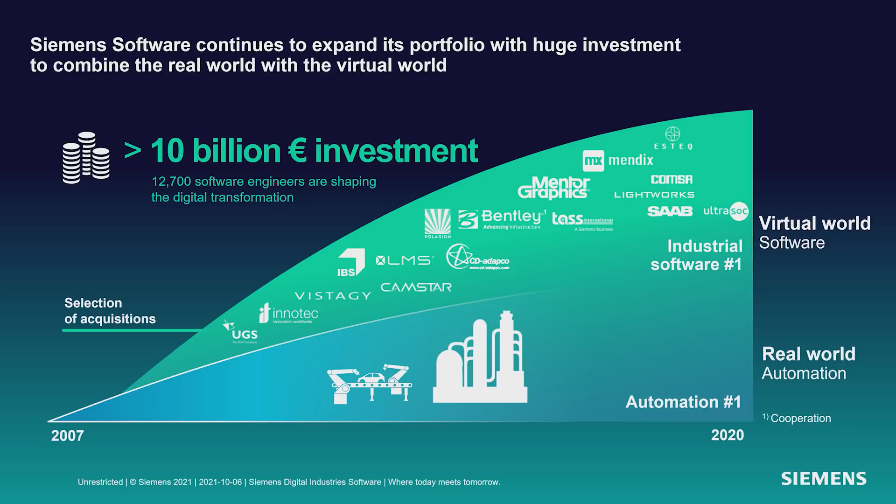One of the reasons we're able to do this is our investment. Over the past 14 years, we've invested more than €10 billion in bringing in new functionality to Siemens. In fact, Siemens is one of the top 10 software companies in the world. This allows us to bring you Xcelerator. Xcelerator is an integrated portfolio of software, services, and application development platform that really speeds your digital transformation. So no matter what you're doing, whether it's mechanical, electronics, manufacturing, we have you covered.

And it all starts with Solid Edge. Solid Edge is your on-ramp, if you will, to digital transformation. You're probably familiar with lots of Solid Edge capabilities for sheet metal, 2D drafting, etc. But maybe you need to go beyond that with the whole Solid Edge portfolio and Xcelerator, whether that's managing that data, doing technical publications, simulation, electrical, it's all there for you.

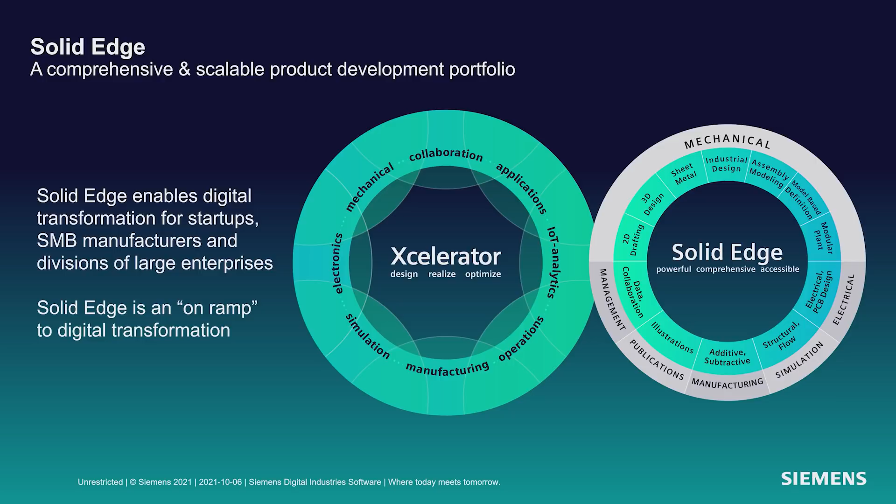And what we see is customers doing amazing things with Solid Edge and the Solid Edge portfolio. For example, Innovates. Innovates is a company in Belgium that makes mobile charging stations. And they're able to take Solid Edge and PADS Pro and use those two together to do great things. As you see, they don't find that level of integration in other engineering software.

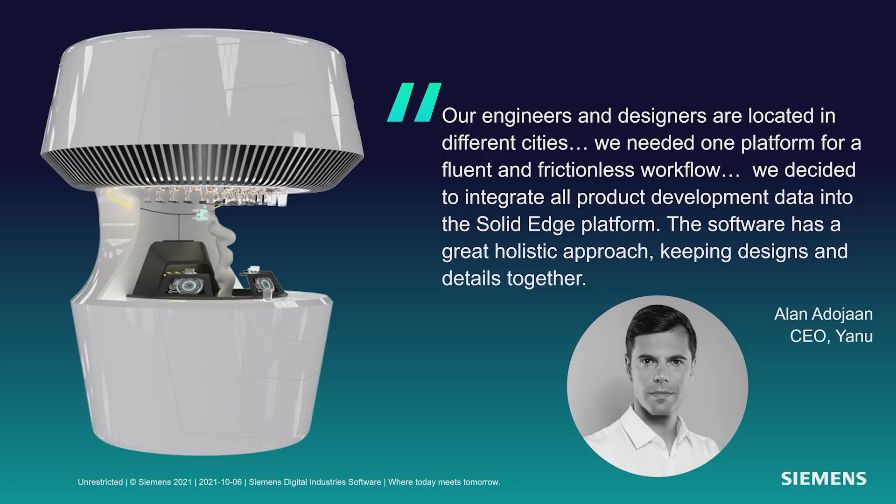Another great example is Yanu. They make the beautiful product you see on the left here. What product might that be? Probably something you've never seen before. This is a fully automatic digital bartender. It can recognize you, make the proper drink, do the proper billing, all contactless, very important today. And I love what Alan has to say. The software has a great holistic design approach, and that's what we like to see and how we can bring you more productive software.

So let's talk about Solid Edge 2022 itself. Solid Edge 2022. Engineered to grow your business. There's so much in it, we'll only be able to cover some of it today. Things like Xcelerator Share, allowing you to collaborate with customers and suppliers. Or CAD Direct, integrating CAD files from other systems and bringing them directly into Solid Edge seamlessly. Point cloud visualization, big scans of plants, being able to design your equipment in context of that big scan. Solid Edge Design Configurator, a whole new capability to configure your designs quickly and easily for your customers.

Now, as we go through our discussion today, we're going to be using two different data sets because there's just so much to see, such a broad range of functionality with Solid Edge. We'll be working with an espresso maker from Fiamma, a company based in Portugal. And we'll also work with a product from Bergner, a company based in Switzerland that makes chemical and pharmaceutical custom machinery.

So let's start by talking about mechanical design. And let's start with CAD Direct. CAD Direct lets you seamlessly integrate data from other systems into Solid Edge without translation and automatically take updates. We'll also talk about convergent modeling. We've been working on this technology for several years now. It's getting very sophisticated. The ability to integrate mesh models with BREP or solid models in one seamless way. So let's look at that with Jeff now.

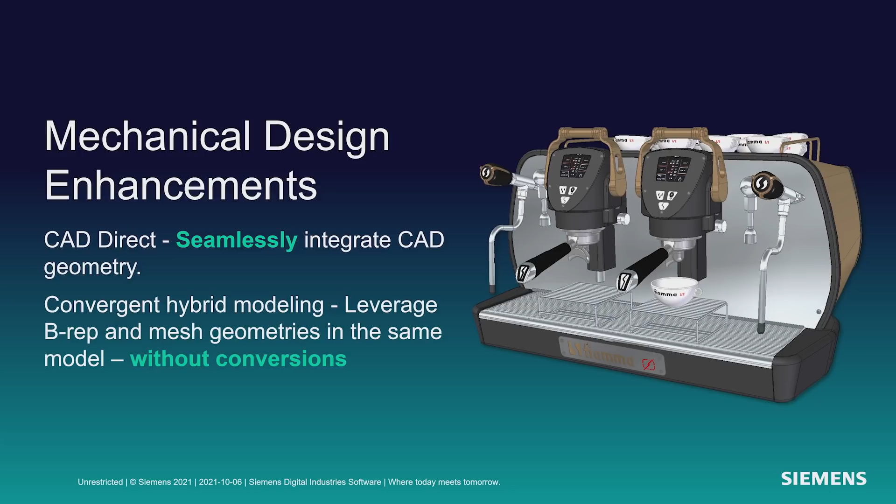Thanks, Dan. First, we'll take a look at subdivision modeling. In this example, we will add support members to the base of the Fiamma espresso machine. The new subdivision bridge command can be used to easily connect edges or faces of subdivision cages and create a lofted structure between them. Here you see an example of that, where we'll select the faces of each subdivision model that we want to loft between.

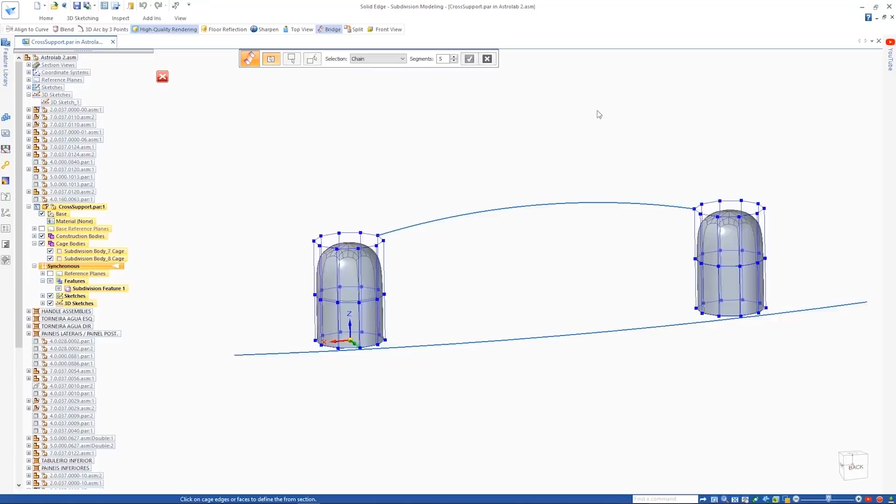Then we'll add the control curve to help us further define the overall shape. Next, we'll be using the new Align to Curve command to further define the shape of the part. Simply by selecting the cage vertices to define the direction and then picking the curve, those vertices are automatically mapped to the curve. You can even sketch your own shapes and curves inside the context of the command. Even gesturing is supported for inking of your curves.

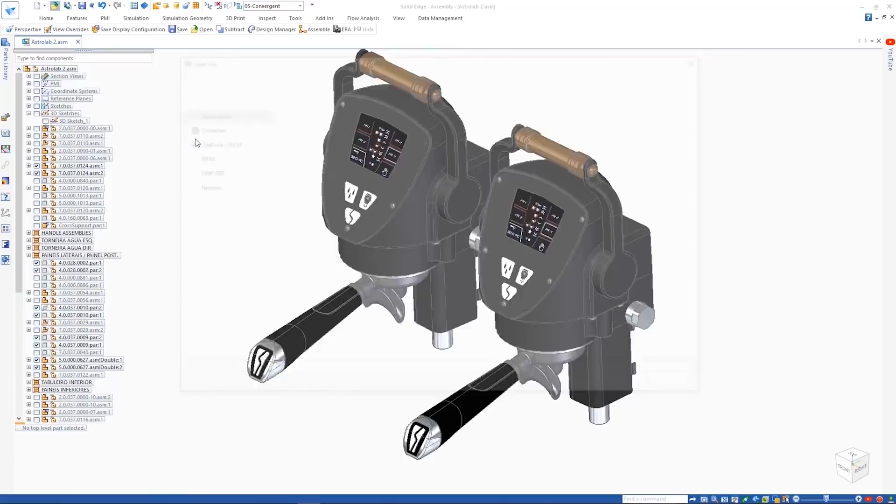Here we'll show another option called Split with Offset to add some pockets to support the rubber feet of the support. A simple selection of the edges with an offset allows you to pull to create the pockets for those rubber feet. Next, we're going to replace the handle with a new design that's been 3D scanned.

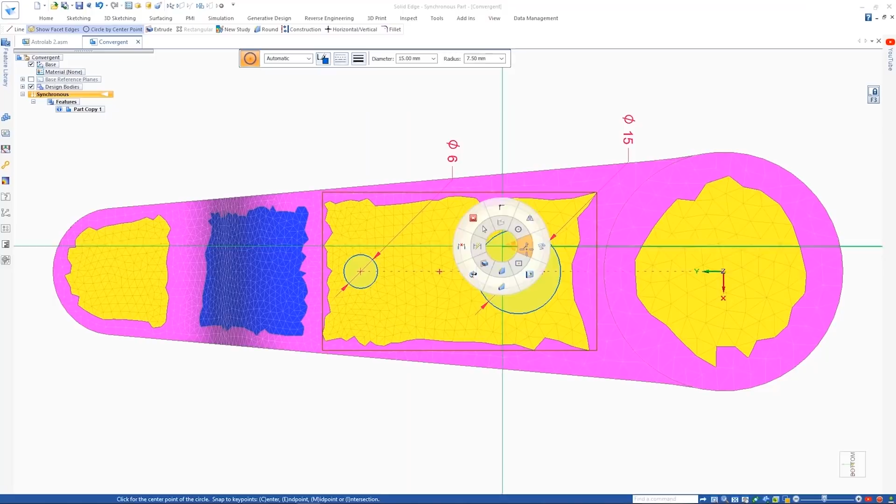This result is a mesh model that we import. We can visualize the mesh with the new Show Facet Edges command. In this case, we'll clean up this model a little with the Remesh command. Now, faces have automatically been identified and the sketches are added to the planar faces of the mesh.

We add a series of cutouts in order to reduce the weight and improve the appearance of the part. Notice the resulting geometry isn't faceted. Solid Edge now seamlessly combines mesh and B-rep geometry in the same body or part. We'll add additional cutouts to reduce the material. Once the cutout is complete, it can be patterned.

Finally, we're back in the assembly where we'll replace the current handle with the new meshed handle. But you'll notice the mounting holes are missing from the component. This can easily be solved by doing a Boolean operation using the mesh model as the target and the components from the assembly as the cutting geometry. These new capabilities further enhance your ability to use mesh models in your design process.

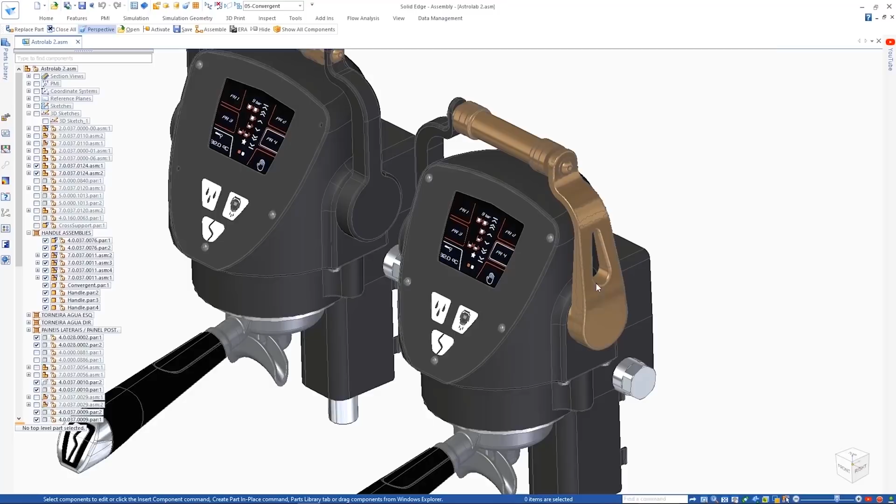Now we'll use the new component finder in the Solid Edge Pathfinder and we'll search for the desired filter holder handle, which is designed as a family of assemblies. One of the versions is designed for a double espresso shot, the other is a single espresso shot. Opening the drawing of this assembly, we'll use the new family of assemblies parts list to place a table and detail the parts used for each member.

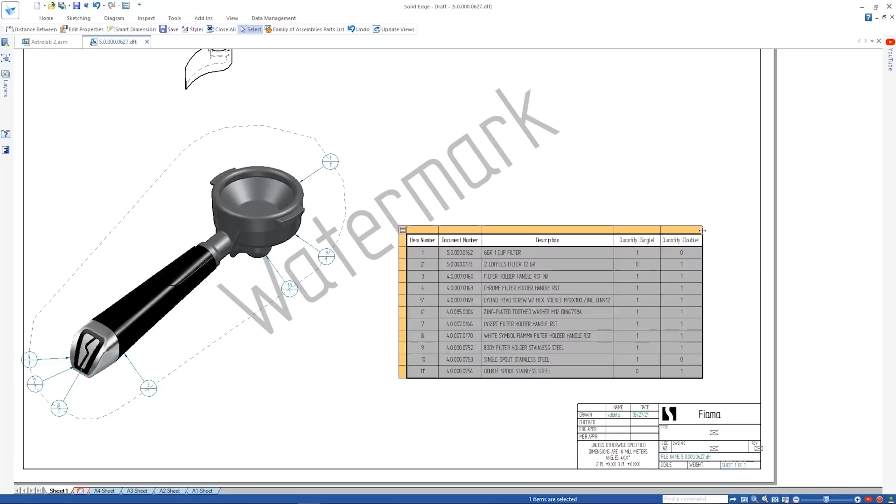Now we'll look at some enhancements to dimensioning in Draft. Dimensioning to virtual intersections or arcs of rounded edges is now supported. We can also choose to display projection lines to those intersection points. Watermarks are also used to convey important information on the drawing. We'll change the existing one so that it retrieves the document status for the drawing property text.

The new CAD Direct command enables us to use foreign CAD data, geometry, and assemblies in Solid Edge directly without requiring any translation. The water boilers that you're looking at here were designed in NX. Once inserted into Solid Edge, they can be positioned just like any other assembly. Since we need two of these, we'll simply copy one to create the second.

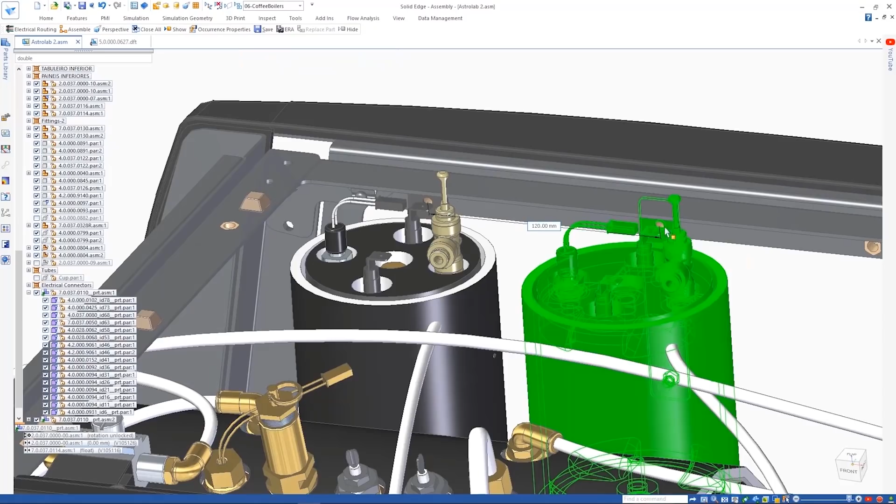Notice the boilers aren't quite in the right location. We'll go back into NX and make the changes needed to the mounting bracket such that they'll be in the right position. Since Solid Edge has associative links with NX, a simple update brings the changes in.

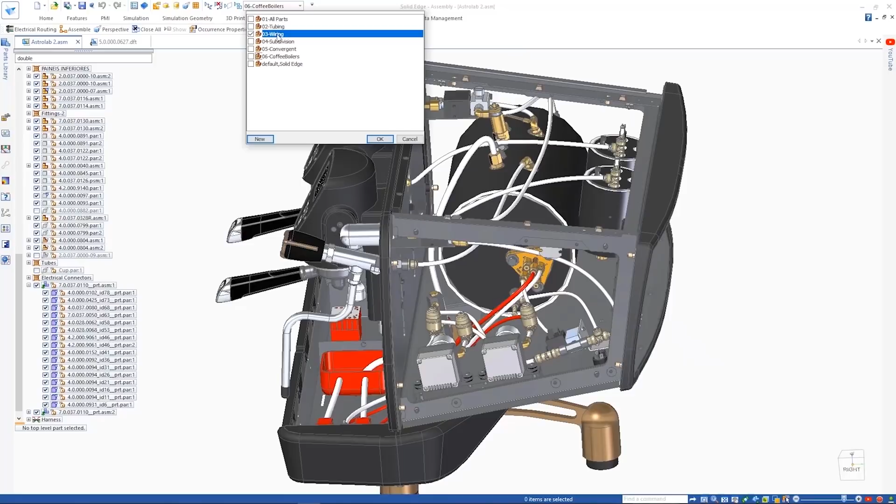Next, we'll look at electrical routing enhancements. Solid Edge now supports the display of bicolored wires, allowing us to change the display of this ground wire to be striped green and yellow. Various pattern types are supported as well, including single stripes, helical stripes, zebra stripes, and dashes.

Back to you, Dan. Thanks, Jeff.

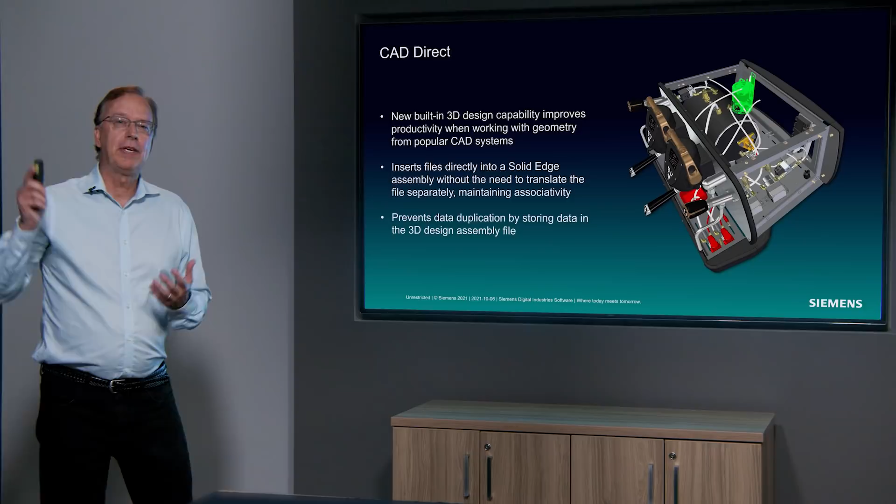Lots of amazing stuff in there, but I'm only going to highlight a couple things here that I think are real game changers. CAD Direct. So you have the capability you've seen to get an NX assembly into Solid Edge directly, no translation. And when you make edits to that NX assembly, it comes into Solid Edge automatically. There's no extra files to manage. You don't have to worry about that.

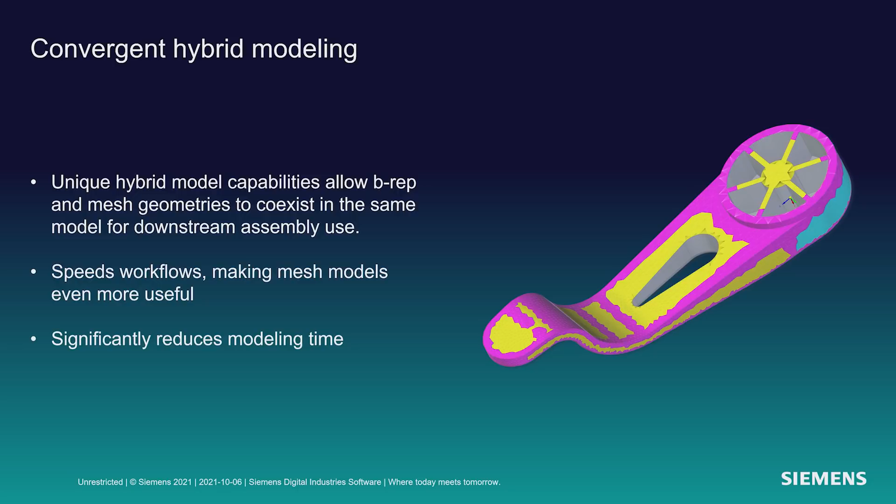It's all CAD Direct. And what about convergent hybrid modeling? You saw taking triangle meshes and B-rep solid models, pulling that all together into a single cohesive model, significantly reducing your design time. Let's talk about some other mechanical design enhancements, some other great things in here.

Point clouds. It's becoming fairly common to be able to scan an entire plant or factory and bring that data forward. We can now bring that data into Solid Edge so that you can design in the context of that factory or plant. What about large assembly modeling? We see people first building parts, then assemblies, then whole factory lines. Assembly modeling in Solid Edge keeps getting faster and faster and faster, best in the business.

And Synchronous Radiate, an amazing new command within the synchronous modeling environment that allows you to deal with radially symmetric parts and edit those effortlessly. So let's take a look at that now, Jeff.

Thanks, Dan. Well, the first thing we'll do is we'll take a look at a new assembly preview mode. And this mode allows you to very quickly open Solid Edge components and very large Solid Edge assemblies lightning fast. In preview mode, you can manipulate the view, show and hide components, and apply display configurations. In this case, we'll isolate the most critical part of the model that we want to edit using a configuration. Then we'll simply tell the system how we want to open, and open only the components that are to be edited, saving you time and memory.

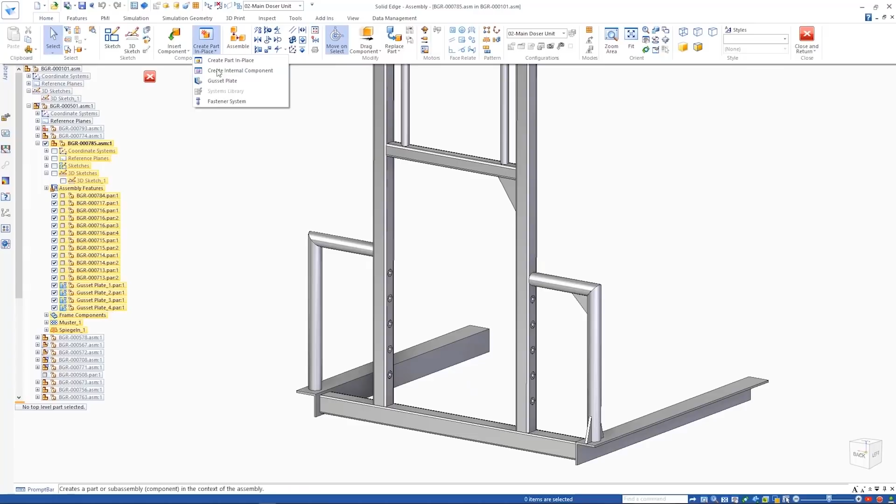Another time-saving enhancement is the gusset command. We now allow you to automatically add gussets to a frame structure. Here you can see the user interface. You can define these gussets in any shape and size that you desire. Then you simply select the frame element, position where the gusset is to go, and the system automatically creates the component there.

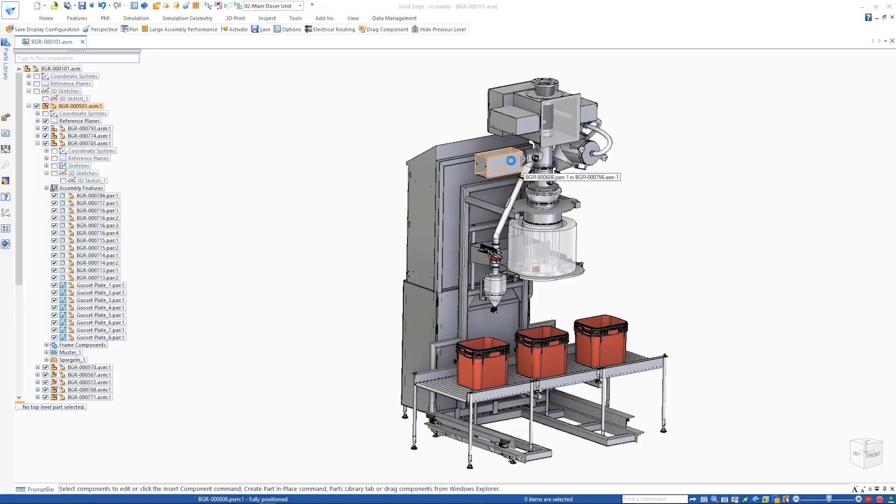If we continue down the internal components theme that we introduced in the last release, we now allow you to create an internal component and actually create the model geometry directly inside the Solid Edge assembly. We've introduced this new assembly modeling capability that gives you the ability to create the entirety of a design without any need for an external file.

Here we have a pneumatic cylinder which will be imported as an internal component. We need to add a bracket to this assembly, but since it's a purchased part, we'll just create this as an internal component. And again, saving the need for external tracking of files. If you'll notice during sketching, a pop-up menu allows you to quickly access commands that are relevant to your selection. And this is new for Solid Edge 2022.

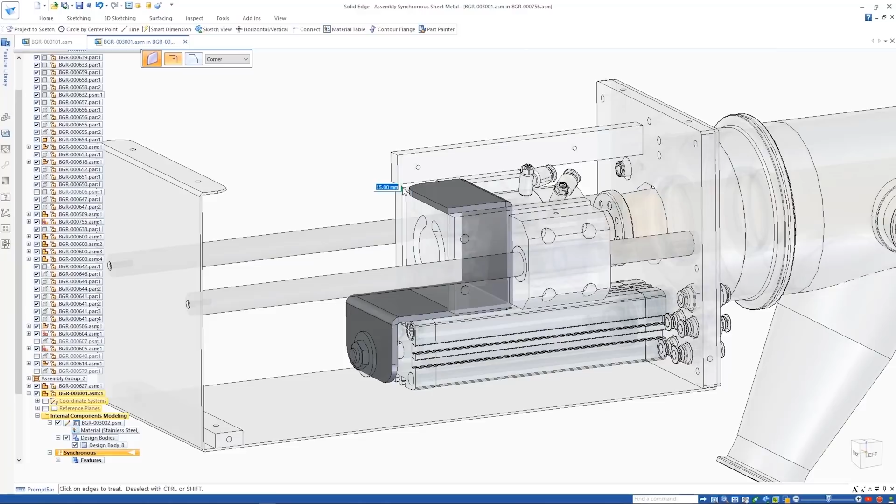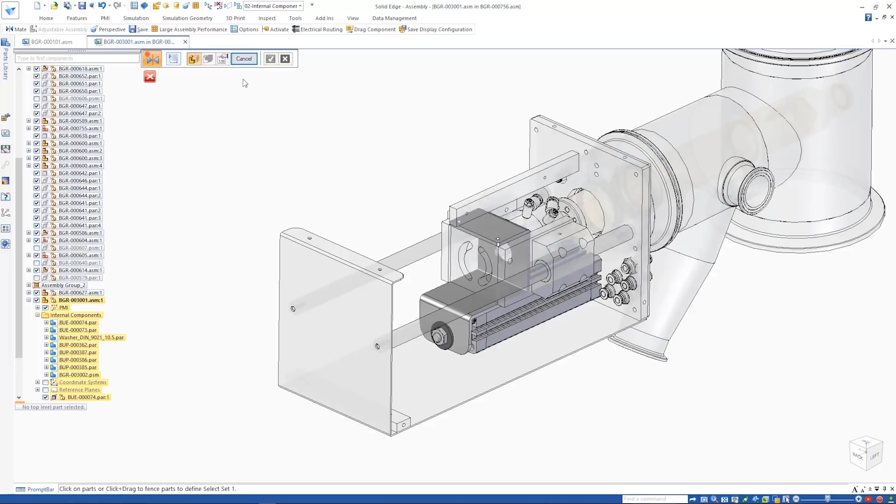So we've defined our sheet metal part. We also will have to give it a material definition and a gauge definition. In addition, we're able to create geometry and reference the components from the assembly, whether they're internal components or they're real components in the assembly. So again, we're defining the material gauge for the sheet metal component, and we've defined this component completely inside the context of this assembly. You're also able to drag the component, doing animations using both internal components as well as the real component combined.

The new component finder speeds up the process for locating parts within the assembly. You simply key in the name and it finds the list quickly. Here we found a shaft, and we used the new radiate command to edit the radius or the diameter of the shaft component. You simply select the shaft, putting the component in the select set that you wish to change, and then Synchronous does the rest. In this particular example, we want to include the pocket in the radiate and the offset option. Simply selecting that pocket and including it allows that to be done.

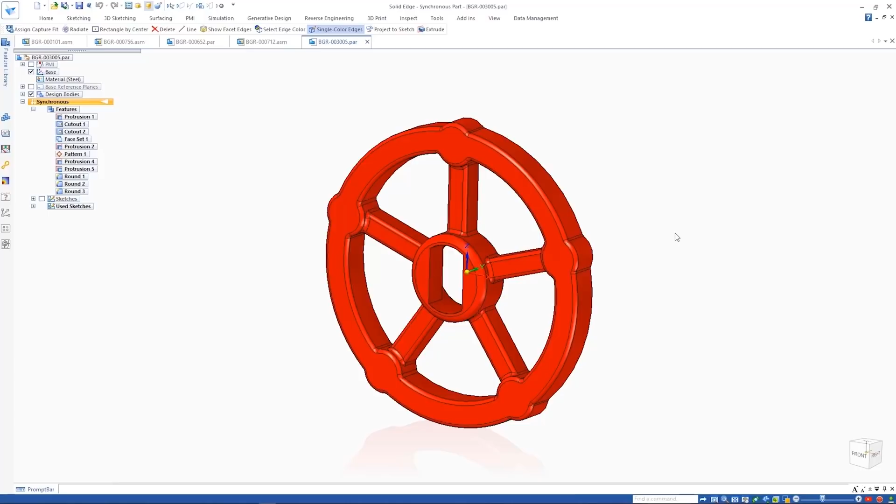A new Assign Capture Fit command allows relationships to be predefined on a component while in the context of the part. Here you can see that Capture Fit relationships already exist. We'll add a new Capture Fit to the collection and save it to the component. When I place the handle into the assembly, all you have to do is select the component and select the mating components that you want to mate it to, and the handle automatically snaps into place. It's as easy as that. Here's another example where we have a handle that needs to snap to 5 new locations. Again, the Assign Capture Fit makes it easy.

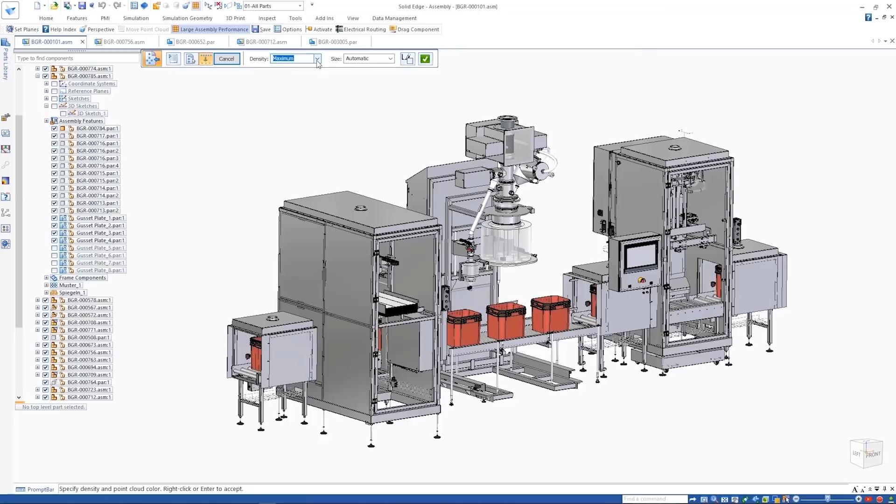Solid Edge now has the ability to place point clouds within the context of your design. This allows you to reference and visually indicate where your components will be placed inside a large assembly. Solid Edge supports multiple point types and then allows you to position your component inside the context of the plant design. The point cloud can be easily repositioned. Clipping planes can be used. You can even measure to the location of the point clouds relative to your design. Here you see that the tank component was in the wrong position and it was moved to match the point cloud and the plant definition more precisely.

And that's it, Dan. Back over to you.

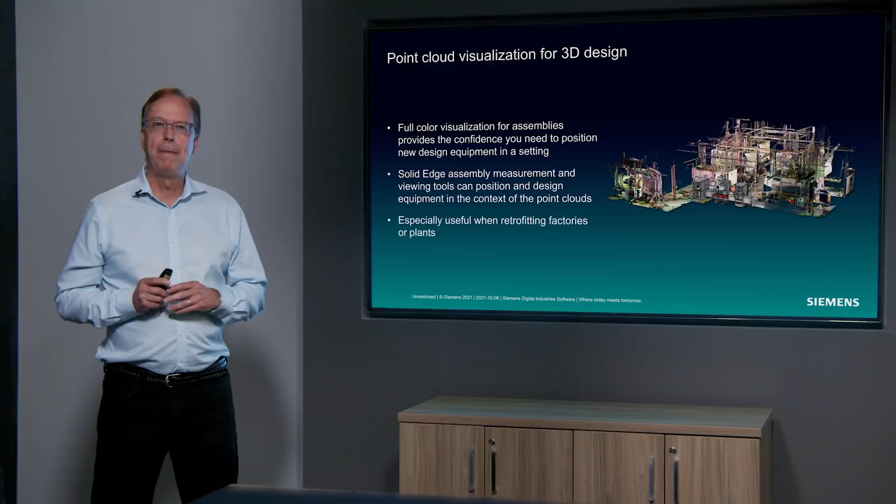All right, thanks, Jeff. So many great things to see in there. But again, something I really want to highlight to you is a game changer. Point cloud visualization. The ability to take scans in, gigantic scans, millions or billions of points, and be able to look at those in the context of Solid Edge and be able to integrate your design directly in there and design in context of that point cloud. As you can see, they're full color, they give the full feel of the plant or factory. Really amazing stuff.

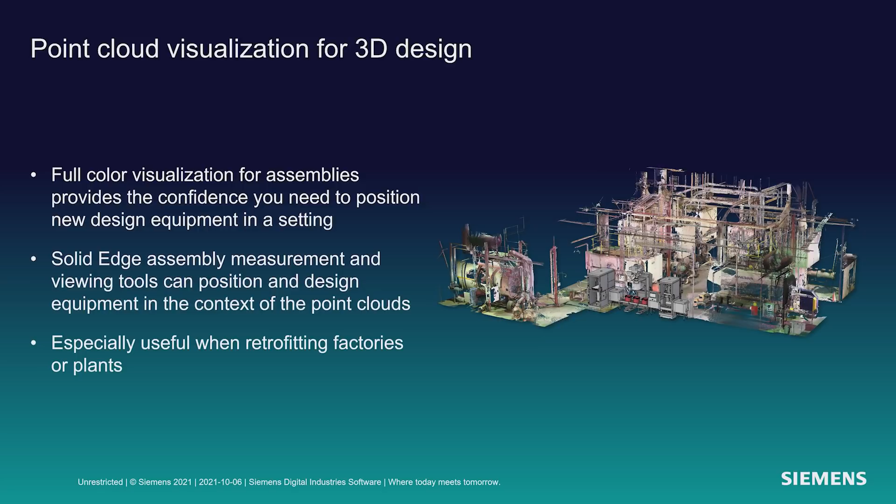And we see that our customers really love this new technology. So Benjamin at Bergner, for example, eliminated a lot of tedious manual effort. It's just so much easier with the new point cloud technology.

And what about large assembly modeling itself? Order of magnitude increase in large assembly modeling performance. So you have that preview mode where you can very quickly bring up the assembly, very, very massive assemblies, decide what you want to work on, and then just bring in that bit of the assembly. Really improve your productivity.

And we see that folks are already taking advantage of this. Our beta customers have been using this, like Luca Carminati at CMS. Much, much faster work, save a lot of work on their designs.

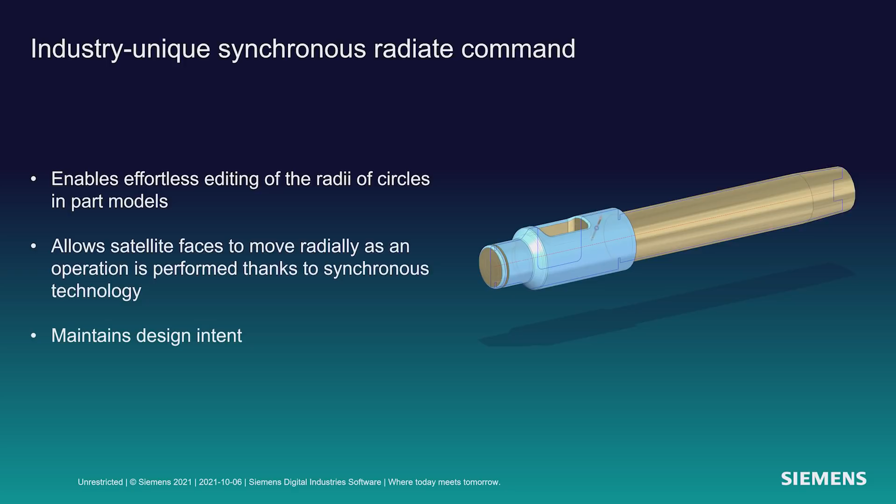And what about synchronous radiate? Really amazing stuff if you're working on those axisymmetric parts. Being able to make edits without having to do any extra effort happens almost magically. Great stuff.

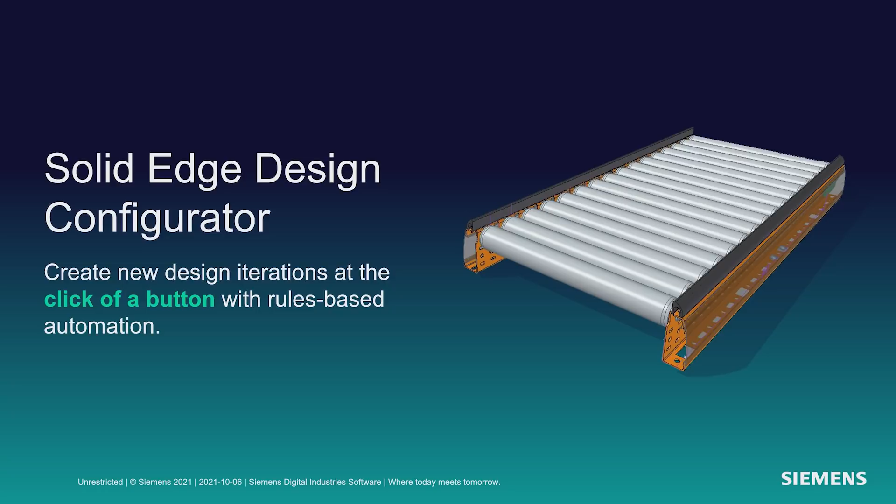Okay, next up is Solid Edge Design Configurator. I'm very excited about this. If you're doing any engineer or configure to order type of products, the ability to very quickly change your designs and have new quotes very quickly. Let's take a look at it with Jeff.

Thanks, Dan. The new Solid Edge Design Configurator allows you to design multiple product variants directly in the context of Solid Edge. In this example, we'll configure a variety of conveyor designs. The first step is to select the component to be configured. The next step is to define the master input parameters of the configuration. In this case, it's the length and width of the conveyor plus the pitch of the rollers.

Values can be easily edited for any parameter, and images can be included in order to help the end user identify the needed inputs when configuring the model. Defining a new input parameter for the pitch of the conveyor, we will quickly configure the name, type, label, and render style to use radio buttons. The pitch value of the conveyor can be customized between 60 and 90.

However, since different lengths of the conveyor require different pitches, visibility rules need to be applied. This is done by making use of a simple expression to define the intelligence. Here, the rules are being validated to ensure consistency and proper definition have been made. Here, the function is going to be copied and pasted to allow you to easily reuse formulas without having to include them again. Skipping to the last step of the configuration, we can see the configuration form is properly created.

Next, defining the rules for the process. Here we have multiple rules to drive and configure the connectors at the bottom of the conveyor. We will use a combination of simple condition and expression rules and a truth map table to work out the number of positions of the connector. All rules can be quickly validated.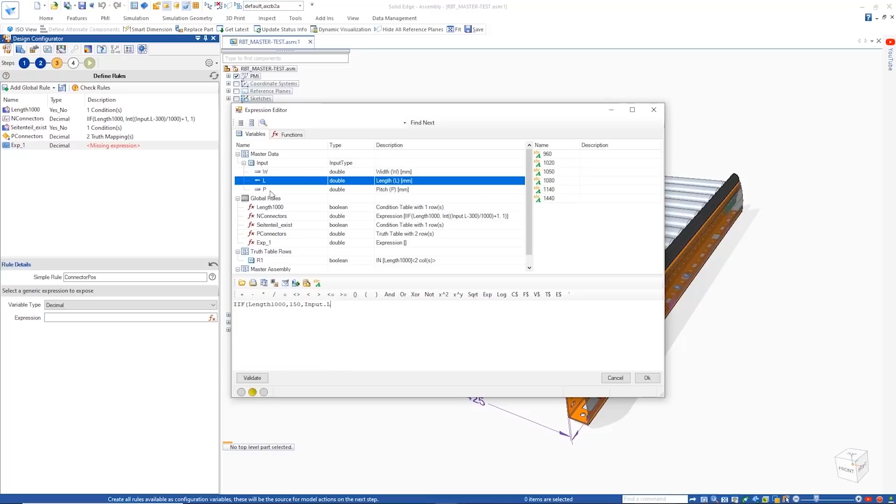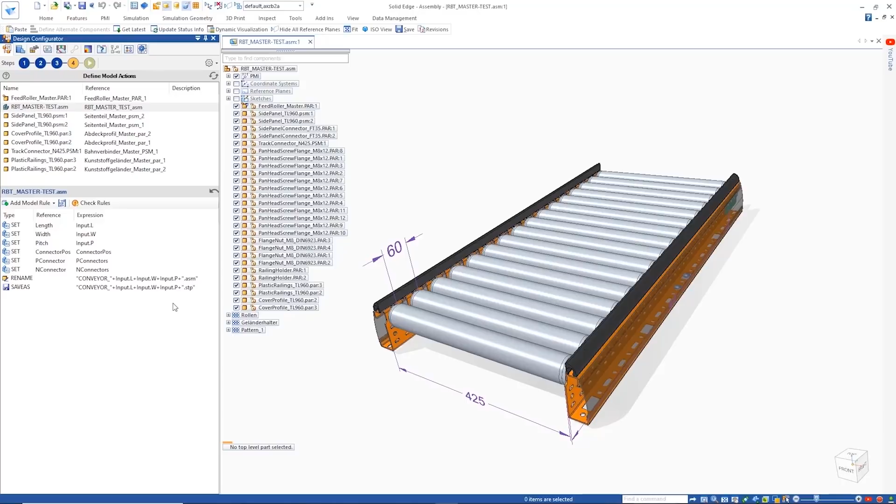Finally, we specify the actions to be taken. Here, variables are set and components are replaced to satisfy the input parameters. A rename model action will ensure our final assembly will be renamed appropriately and also create the other necessary outputs, for example, a STEP file as shown here.

Now we can run it quickly and create as many configurations as needed. A newly generated configuration can easily be shared with Pack and Go. The configuration logic is all stored within the CAD model. There's no need for any further plugins or external resources. And with that, Dan, I'll hand it back to you. All right, thanks, Jeff.

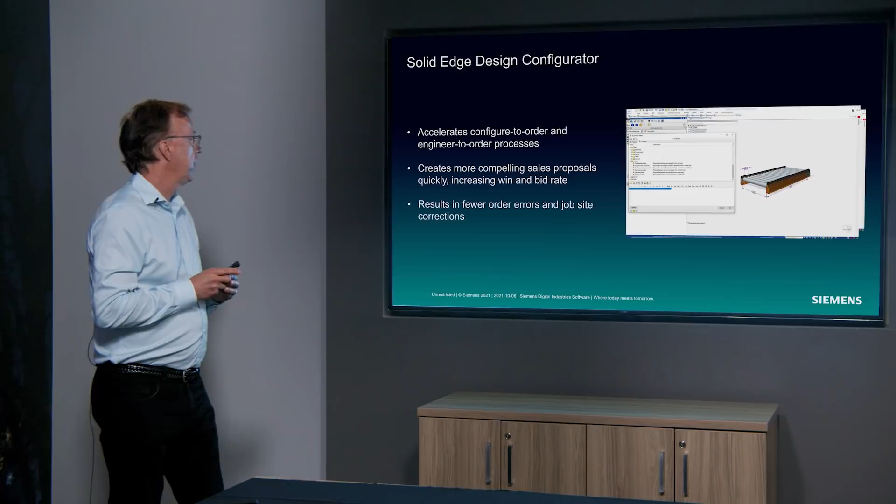So as you see, with the Solid Edge Design Configurator, you can accelerate your configure to order and engineer to order processes and create compelling sales proposals. You're also going to see that it really error checks for you and it creates a nice dialogue for your users to interact with so you can very quickly configure new products.

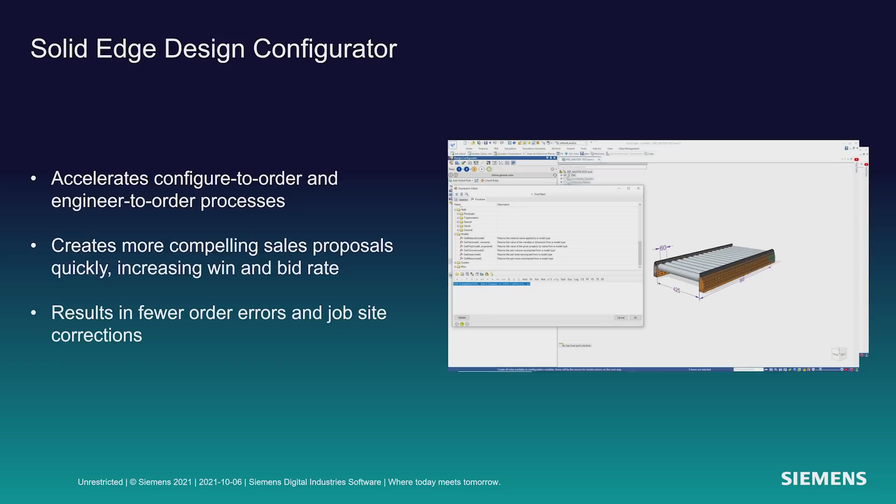What about CAM? Solid Edge CAM Pro. Tried and true technology developed over the last 40 years. A lot of users are using it today and enjoy the benefits of it. But what if that technology was available to all of you, all Solid Edge customers on maintenance? That's what we want to introduce to you today with Solid Edge 2022. Jeff. Thanks, Dan.

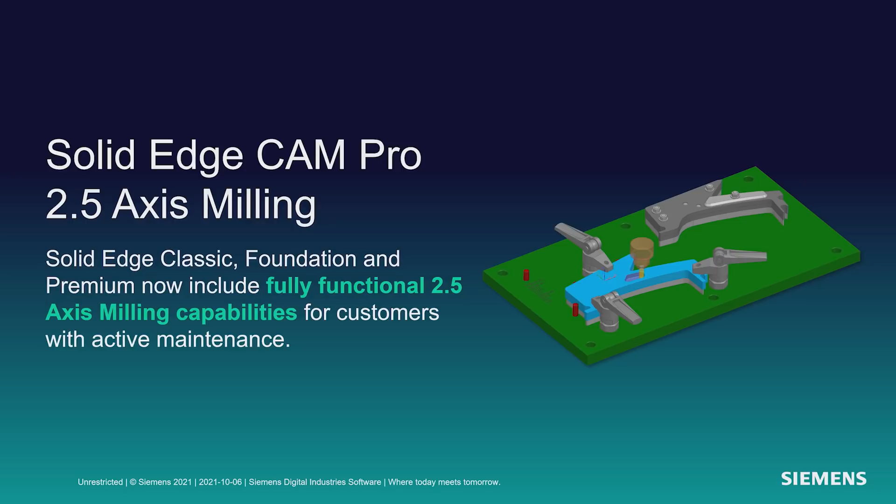Here we'll be using Solid Edge CAM Pro to create the manufacturing toolpath for the rear legs of the Fiamma espresso machine. First, we'll use the Solid Edge assembly tools to create the shape to represent the stock parts, and also the parts that form the fixture assembly, which includes the standoff plate as well as additional fixing holes from the standard database.

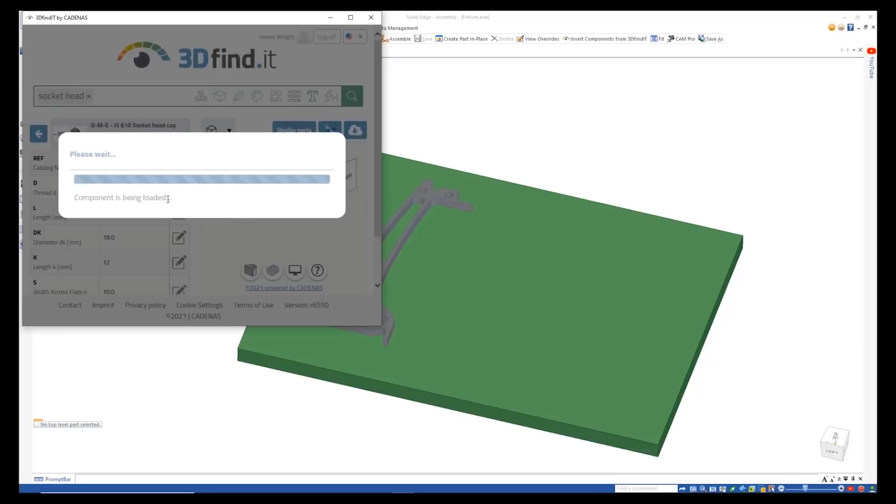We will also make use of the supplier catalog in 3Dfind.it to get the appropriate socket head cap screws to be used to fix the component in the fixture. So as you can see, Solid Edge is a great CAD for CAM tool.

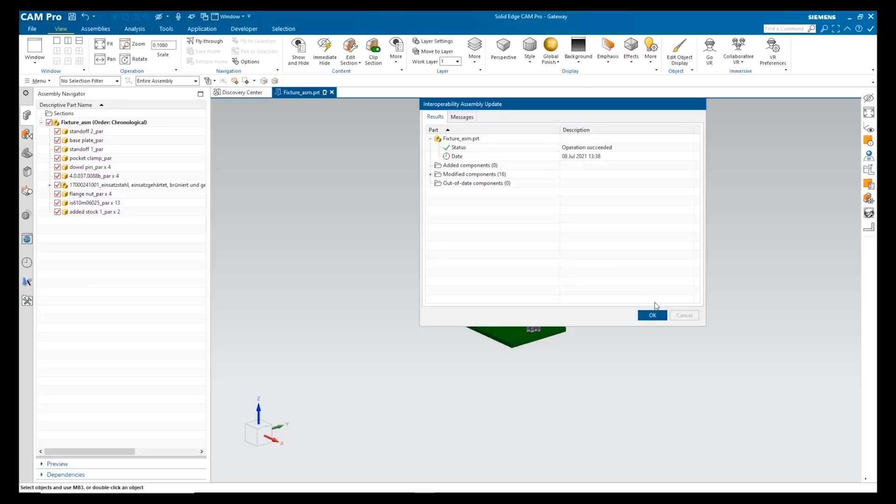We'll need to machine this in two separate steps. Step 1 is to mill the pocket and drill the holes, and step 2 is to machine the profile. One click will send the entire assembly to the Solid Edge CAM Pro application. Note that associativity is maintained to the complete assembly, so if there are any last-minute changes, we can quickly update them and continue the NC programming process.

New for Solid Edge CAM Pro is the ability to create adaptive roughing toolpaths for 2.5-axis operations. This is included at no additional cost. These are faster than traditional toolpaths and extend the cutting life of your tools. Notice the advanced graphic capabilities for validating your toolpath.

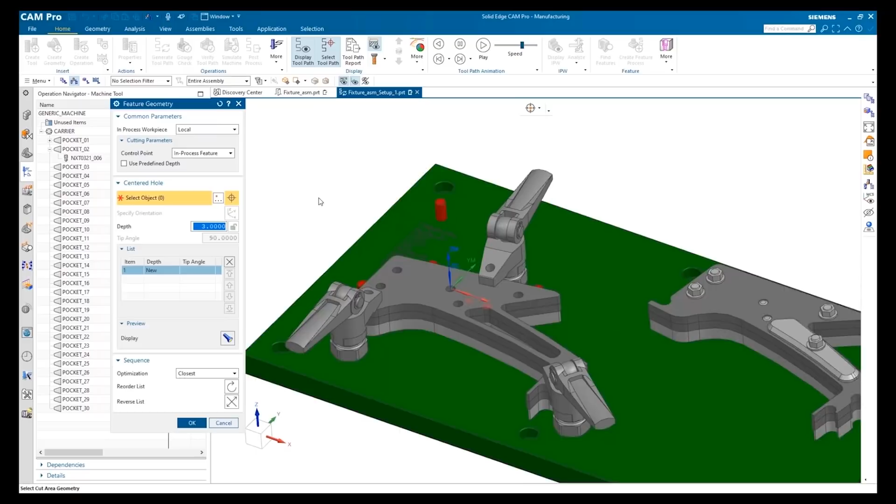Here we'll create spot drilling operations for the 5 holes in the support. Notice the graphical pop-up hints that help us with operation selection. Graphical helps are also available for geometric selection. Each time we select a hole, we get a preview of the machining that will take place. Again, at any point in the process, we can get visual feedback on our decisions.

Now that our CNC program is complete, let's run through the whole visualization process. Notice you get to completely visualize the entire machining process before committing it to machining. Of course, no job is finished until it has been post-processed for a specific machine. That's where PostHub comes in. It's an online database of over 1,200 post-processors. You can easily filter and find exactly the one you need. Also, PostHub is constantly updated, bringing you the most recent tools.

And Dan, with that, I'll turn it back over to you. All right, thanks, Jeff. I'm really excited about this. There's a great heritage in Solid Edge CAM Pro and our machining technology over the last 40 years. Many people enjoying that technology, but now every Solid Edge user who's on maintenance can enjoy that technology and work with Solid Edge CAM Pro.

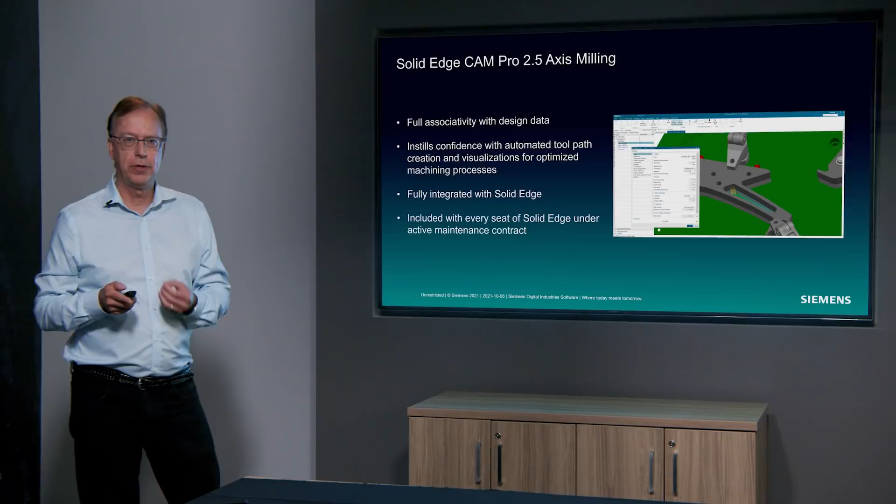Next up is Xcelerator Share. I'm super excited about this. It's a functionality in Solid Edge that allows you to collaborate with colleagues, suppliers, customers very easily. Nothing for you to set up, works on all sorts of devices. So let's take a look at that.

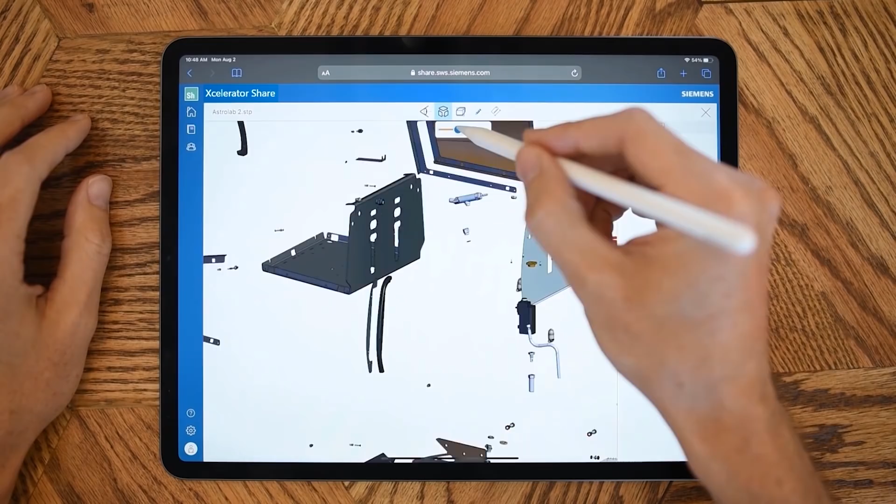Jeff. Thanks, Dan. Xcelerator Share allows you to import your CAD models into a secure cloud location. Within that context, you can view, you can rotate, you can show/hide, you can 3D section, you can even do measurements and markups. Here, a reviewer has identified the need for some change in the design. The location of the change is identified by a sticky note and a place describing the needed change.

Xcelerator Share offers maximum traceability, as all markups are recorded, enabling conversations back and forth on any of the issues you're tracking. It also records who made the markups and when they were made. We can also easily go back to the markups at any time. Simply save your markups and send them to the designer for review.

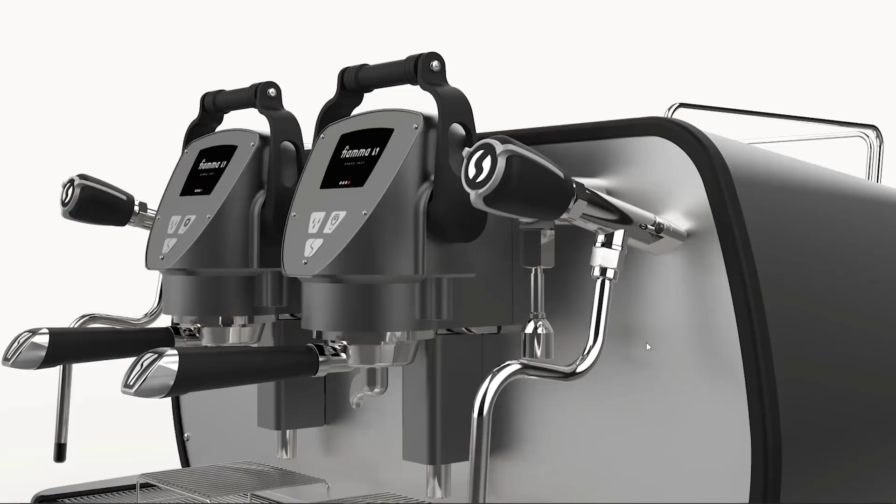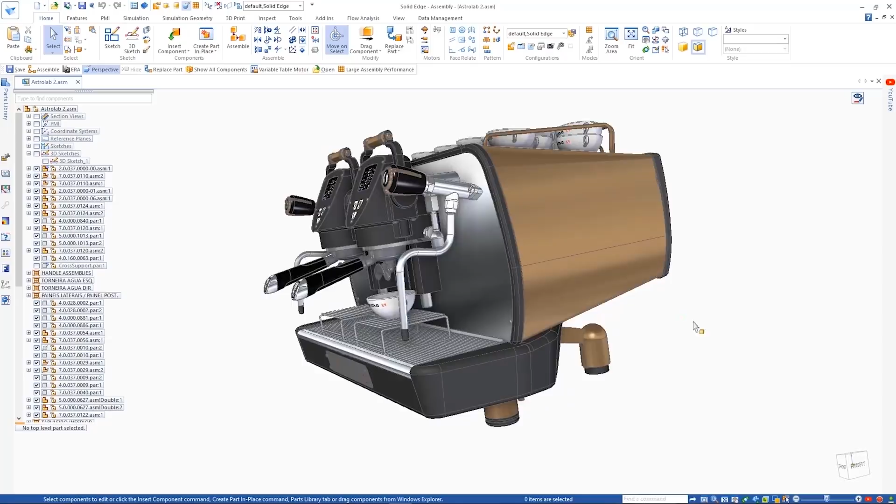With Share, you can also directly connect to Solid Edge, synchronizing your data from your desktop to the cloud. Here we have the same project on our desktop. It's represented simply as a folder. Any data that we have in this folder will get synchronized in the background. In Solid Edge, we can securely sign in to Xcelerator Share and see those same cloud-based projects. The espresso machine can be opened and we can go right to work on the part in question. The designer can easily access that same markup in the cloud directly from within Solid Edge.

Once completing the change, another markup continues that two-way conversation and collaboration with other stakeholders so that the issues are tracked appropriately. Another great feature of Xcelerator Share is the ability to share a project with anyone. Simply enter the email address of the person with whom you'd like to share and choose their access permission level. Here we can choose View, or View and Download, or Edit and Download, depending on how you want to protect your intellectual property. We'll share this design with one of your colleagues and our customers and give them the appropriate access.

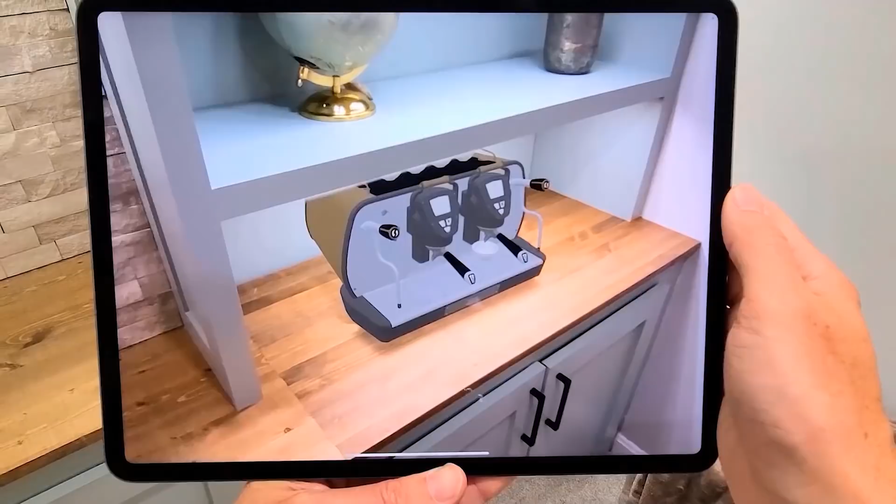Finally, with the Share Augmented Reality feature, you can see exactly how your designs will look in the real-world environment. Snap the design onto any surface seen in the camera lens at the correct scale. Finger gestures can be used to manipulate the model and easily visualize what your design looks like in a real environment. So back over to you, Dan.

Thanks, Jeff. All right, Xcelerator Share. Really great stuff. Next generation cloud-based collaboration that allows you to work inside your company with colleagues or work with suppliers, work with customers. Nothing for you to set up. Works on every device. So whether you have a Mac or an iPad or a Chromebook, it works on all those devices with no special setup. And you saw the ability to write notes that are automatically converted to text, share those markups. Very exciting stuff.

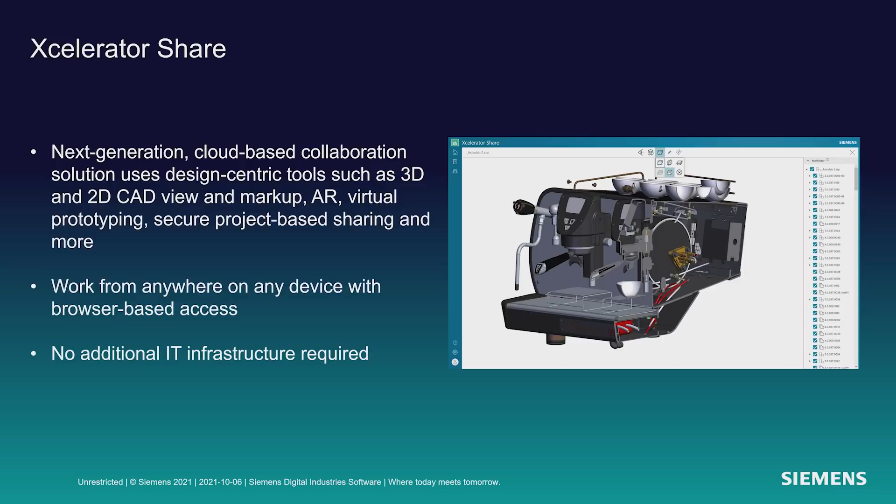Next up is dynamic visualization. You make complicated products, large assemblies. How do you know which parts are from which supplier, or which parts are of what material? Dynamic visualization will help you with that problem. Let's take a look at that now with Jeff.

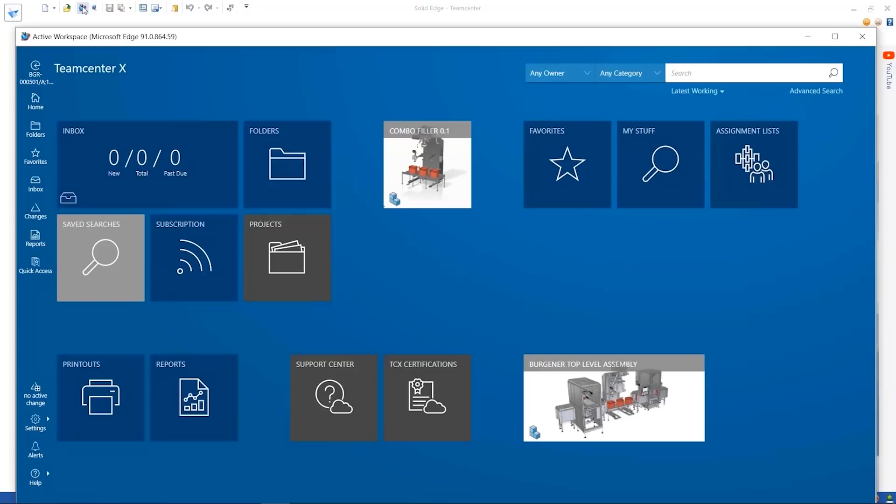Thanks, Dan. Dynamic visualization gives you great capabilities to generate visual reports of your assembly. We'll open a Solid Edge assembly using Teamcenter Active Workspace and create a visual report based on the component supplier and material definition. First, you add columns to the user interface that you want to filter on—here we've added suppliers and material—then filter on the particular material and supplier you're interested in visualizing.

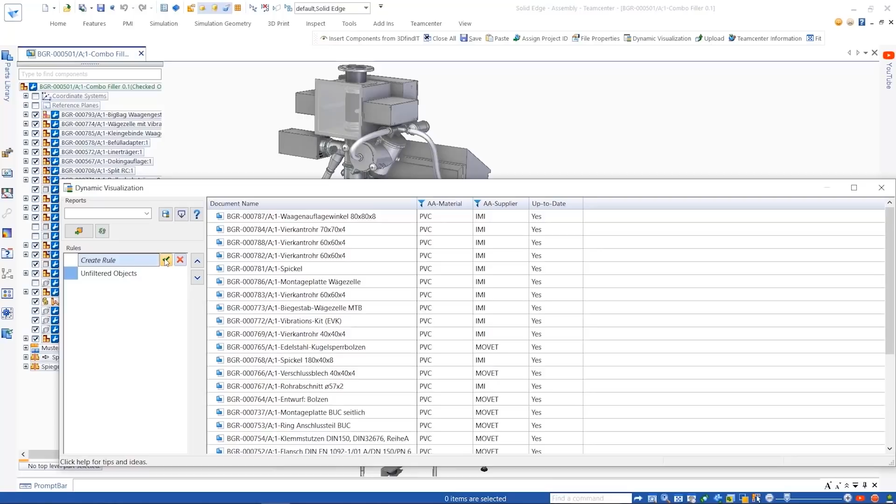Once the rule is created, you simply apply it, and the model changes display to show the rule definition. Here you can see in red the components based on that supplier and material selected. You can also export these rules and import them into various assemblies.

Here we have a rule that allows us to identify which user created which components. We'll modify that rule to allow us to identify work in progress as well as components created by Pat.

We can highlight those, select them, and then go into edit mode. Here we'll see we need to add a warning light to this box. We use 3DfindIT to find the particular light from the particular supplier that we want.

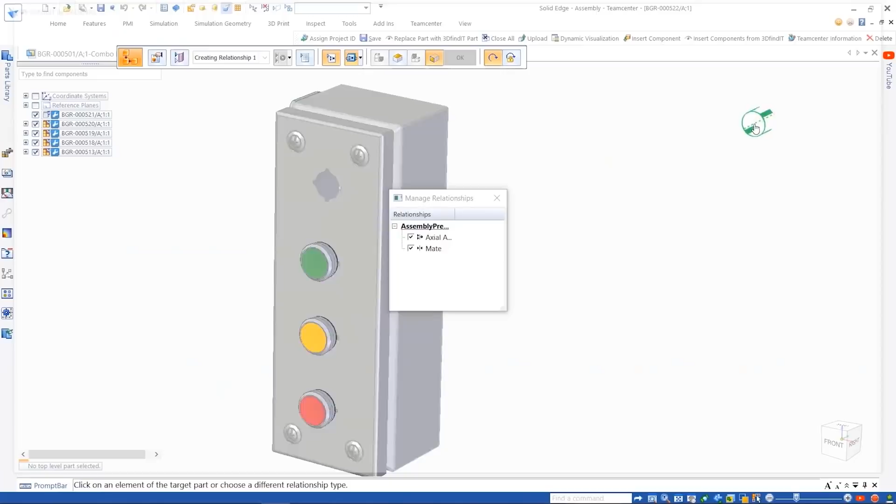Once we've identified the right one, we'll generate the component in Solid Edge. But in this case, the component already exists in the Teamcenter database, so instead of replicating it, we'll simply reuse what's already there.

Also in Solid Edge 2022, we're able to take advantage of the project definitions within Teamcenter. Here we can see we've assigned the components to a particular project in Teamcenter.

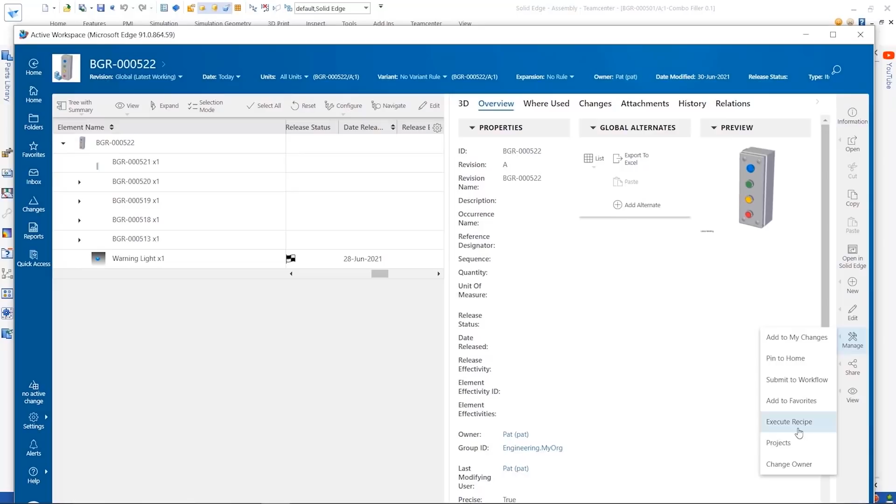The Solid Edge built-in data management also supports dynamic visualization. Here again, we'll display the assembly coloring based on the material type to ensure we have the proper materials throughout the model.

So again, the rule is applied and visually displayed, and you'll notice the red handles should be green—those should be stainless steel and not aluminum. So we'll send those back to the designer to be reworked with the proper material applied.

Once applied, we can do an auto update of the status, and the system will automatically show us the status and update to get the latest component. In this case, the handles are updated with the proper material. We'll rerun the same rule, and you'll see the handles are now green and therefore in the correct material.

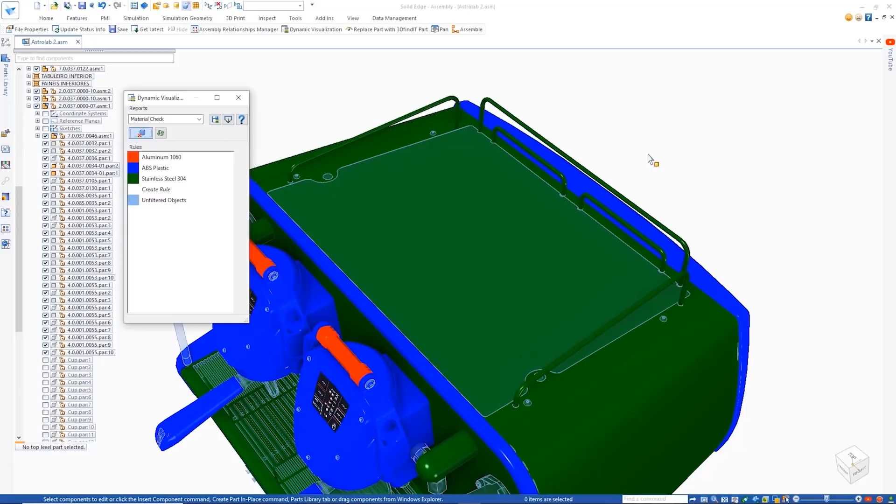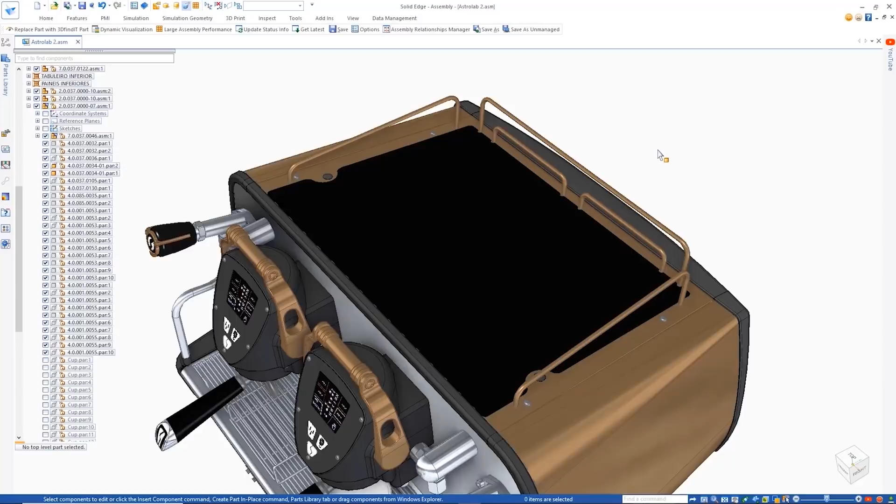This next example will use replace part with 3DfindIT. 3DfindIT has the ability to take a component and use its geometry to search the catalog database for similar components.

Once the component is found, we identify the supplier that we desire, and with a few simple clicks, that component is inserted into the assembly, replacing the previous geometry.

And lastly, we've added Pack and Go directly to the Windows Explorer UI, making it easy for you to share your data without having to open the assembly within Solid Edge. That's it, Dan. Back to you.

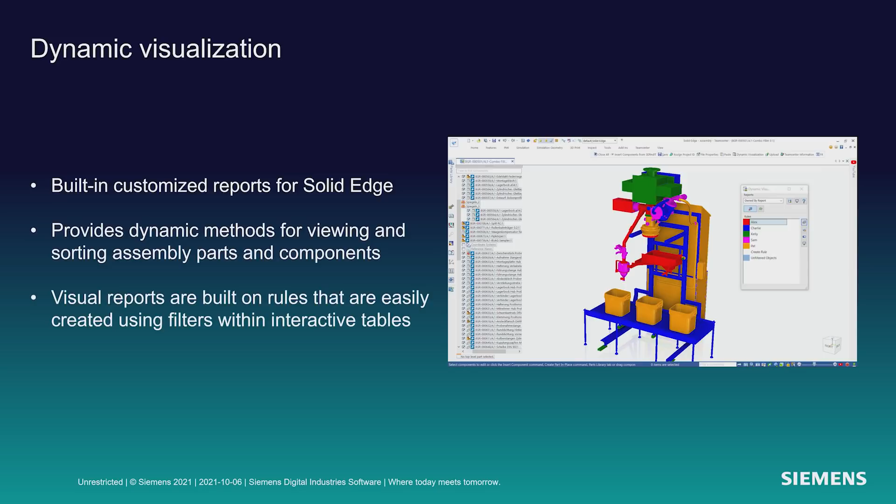All right, thanks so much, Jeff. So many good things you saw there with 3D Find It and the ability to replace components, search directly using geometric shapes, and so on.

But I want to highlight this dynamic visualization—being able to say, what supplier do I have for the different components? Color code for me all the things that are stainless steel. Color code for me all the parts that are in work. Amazing technology that would save you a lot of time and money.

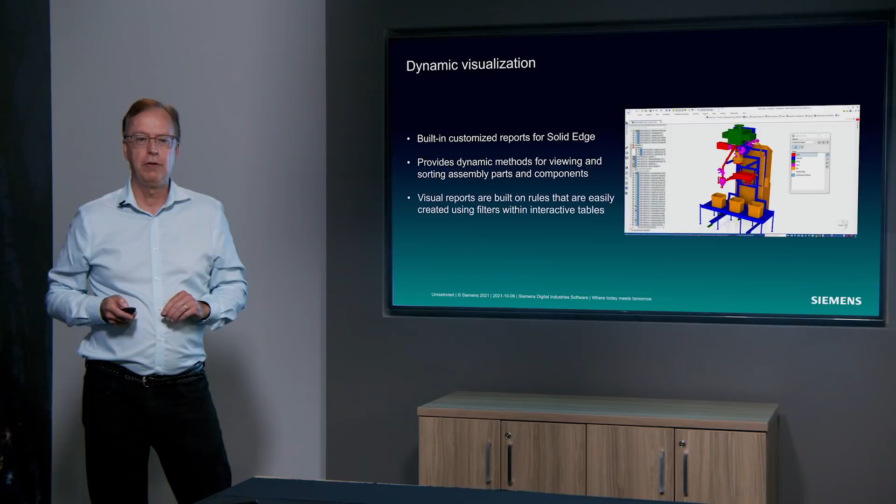Next up is Solid Edge simulation. We have some great enhancements in there, some game-changing enhancements in terms of the ability to remesh parts using the body mesh command, and some other great tools. Let's take a look at those, Jeff.

Thanks, Dan. We'll start by looking at a new boundary condition allowing the user to apply hydrostatic pressure to a model. We'll apply a configuration that gives us the geometry of interest. Here we want to look at this tank on the left and do an analysis, assuming that tank is filled with liquid.

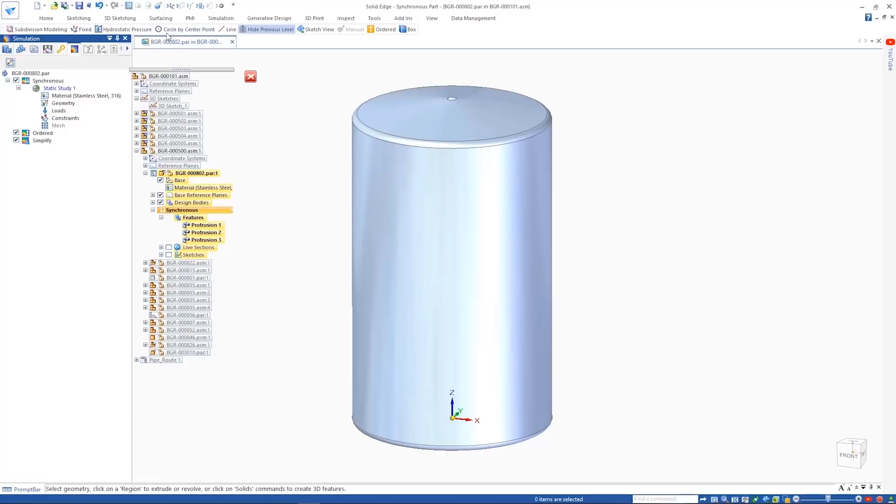So we'll create a hydrostatic study, and in the definition of the loads, we'll use the new hydrostatic pressure command. All you have to do is identify the surface to apply the load, identify the depth of the liquid in the tank, and then provide the density of the liquid within the tank. Solid Edge will do the rest.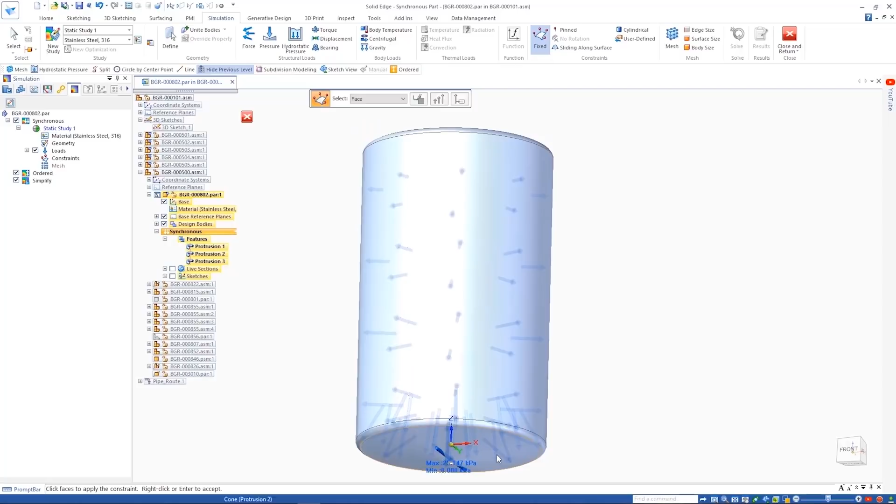To finish the analysis model, we'll apply constraints to the bottom of the tank and then perform the meshing and analysis as needed. Notice on the new mesh dialog a body mesh.

This is proprietary technology from Siemens that does a really good job meshing complex models. Some things that couldn't be meshed before can now easily be meshed much quicker and much more reliably than in the past.

So here you see the result of the hydrostatic pressure load in this tank. We'll change the liquid level in the tank and run the analysis again just to validate that this tank will withstand the pressure exerted on it in production.

There you see the animation of the stresses, and they show up in the obvious place at the bottom of the tank where you might expect.

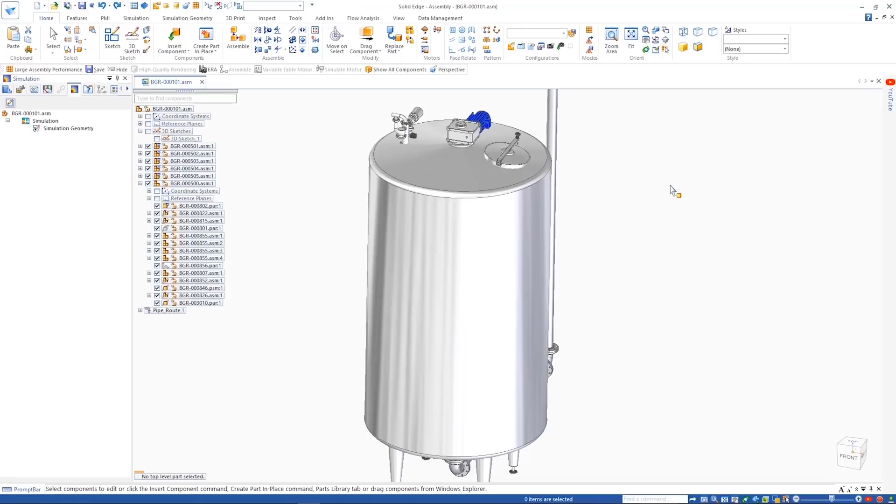Another great enhancement we have in simulation for Solid Edge 2022 is improvements to beam meshing. Here we're taking a frame structure and creating beam elements for the finite element analysis. Notice that the rigid connectors were automatically placed.

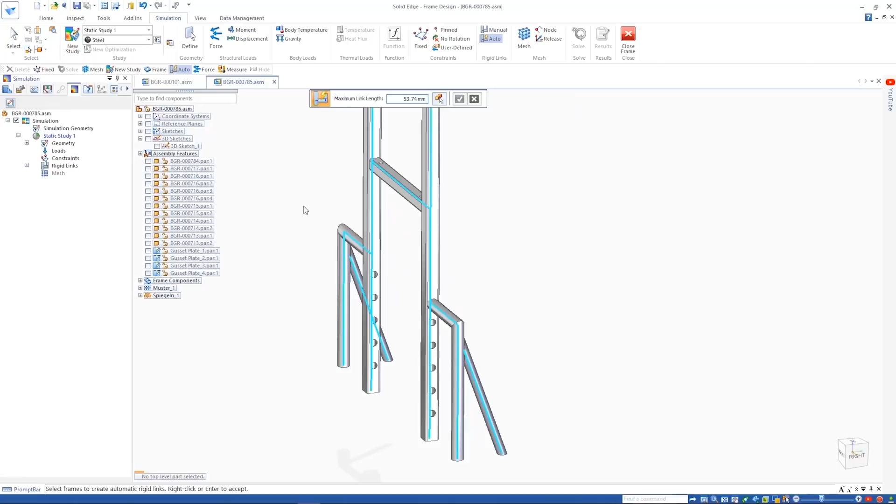We've improved significantly our ability to create those connectors automatically without any user intervention. Here the user has selected the bottom and changed some of the parameters to get the rigid connections correct. The bottom of the frame is then fixed, loads are applied, and the analysis is run.

Once complete, you'll see some enhancements to the output, to the post-processing for this model. We can now post-process and display contours using von Mises stress, and we've also improved factor of safety stress contours based on those same von Mises stresses.

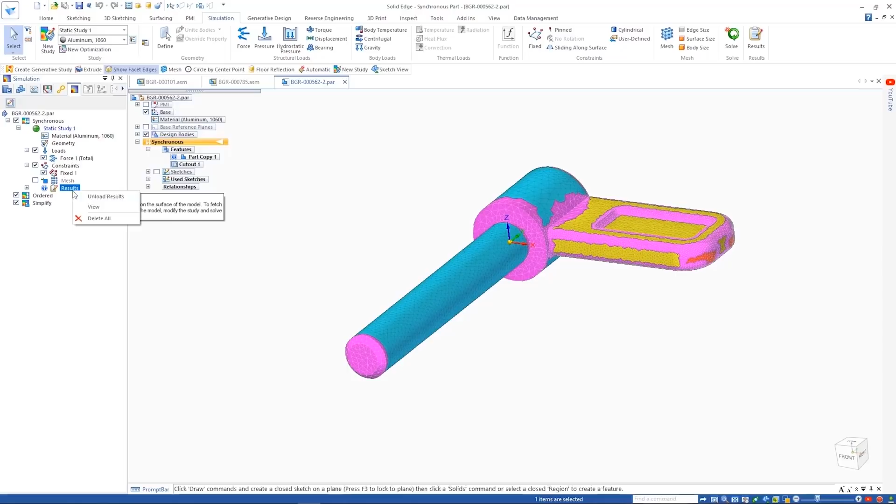Now back to the assembly, we're going to do another analysis on the pin within this assembly. You notice this pin is a mesh model. Simulation can now perform analysis on mesh models. You simply apply the boundary conditions, the loads and constraints where needed, and run the analysis. Here you see the result for the pin on this mesh model.

And with that, Dan, I'll turn it back over to you.

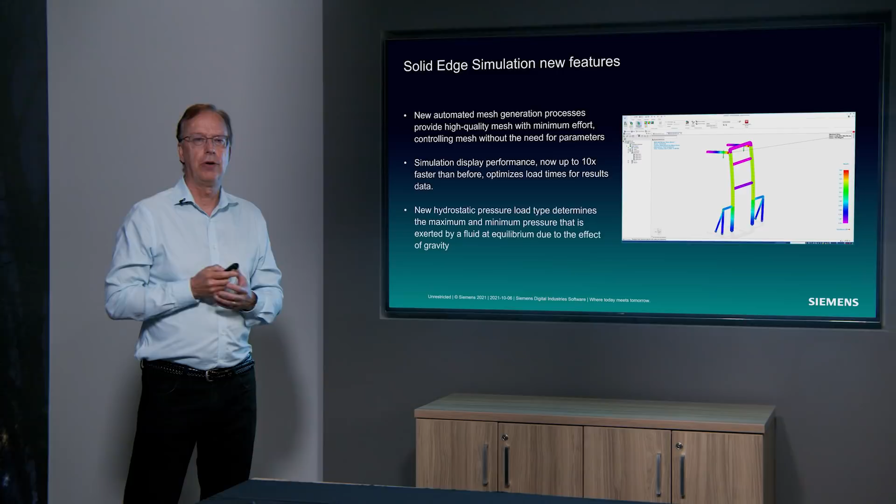The way the beam elements are automatically connected together, great stuff. But also that body mesher - you can take a mesh that's very irregular, very difficult, and remesh it with the body mesher. It's a game changer for analysis.

Next up is Simcenter Flomaster for Solid Edge. If you're doing any types of products where you have piping and you need to do analysis on the piping, or design on the piping and the flow within the pipes, Simcenter Flomaster for Solid Edge is for you. Let's take a look at how it works with Jeff.

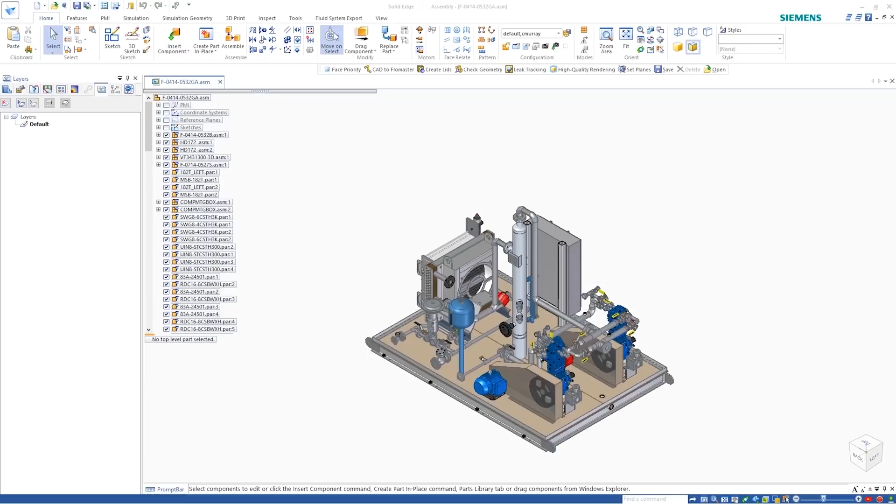Thanks, Dan. The unique CAD to Flomaster technology extracts the geometry from the Solid Edge assembly and automatically creates the corresponding fluid volume that exists inside the pipe runs and components. During the process, a face can be selected to give the length scale and convert the system to a subsystem.

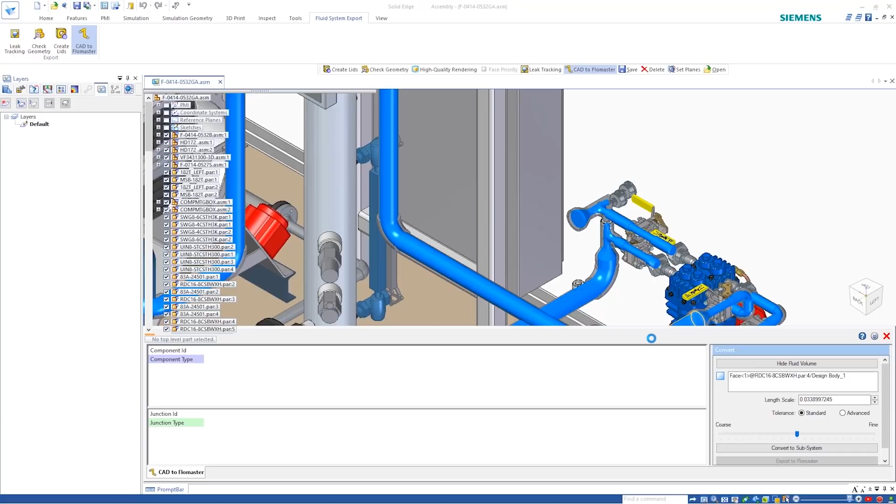The abstraction process is fully automated. There is also full control over the fidelity of the model, which can be adjusted with the slide bar.

Individual elements can be inspected, deleted, and merged. Once the network configuration is defined, the geometry can be exported to Flomaster.

Following export, the file will be saved for reuse, then automatically opened in Simcenter Flomaster for Solid Edge in the Subsystem Import Wizard. The CAD geometry, centerline, and component connections can be seen in the wizard, and the model can be rotated to the desired projection when the network is created.

On selecting import, a new subsystem will be created for review. The entire subsystem can be used to create a model, or individual pipelines can be extracted into their own subsystem.

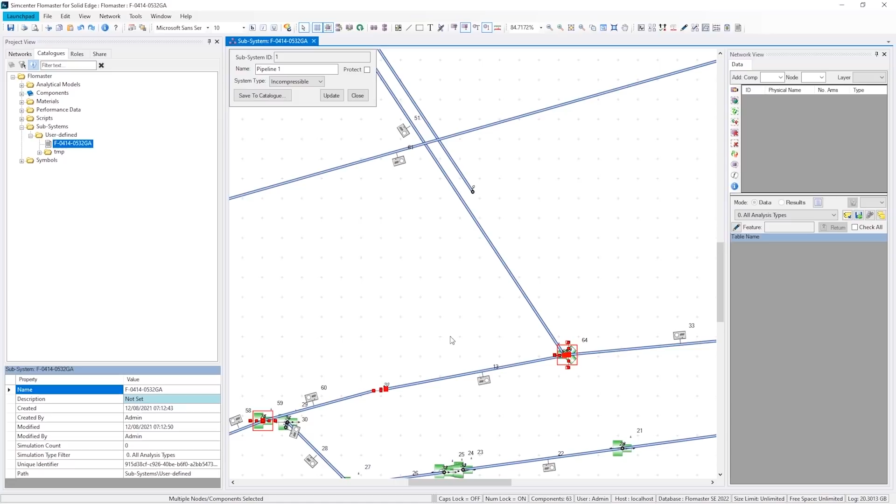For a flow analysis of this model, we are going to extract the pipe from the two compressors to the center vessel. We create a second subsystem from the first and save it in the subsystem catalog.

We'll now add the subsystem to a new network and specify the boundary conditions using pressure sources. We'll specify the compressor outlet pressure and vessel inlet pressures.

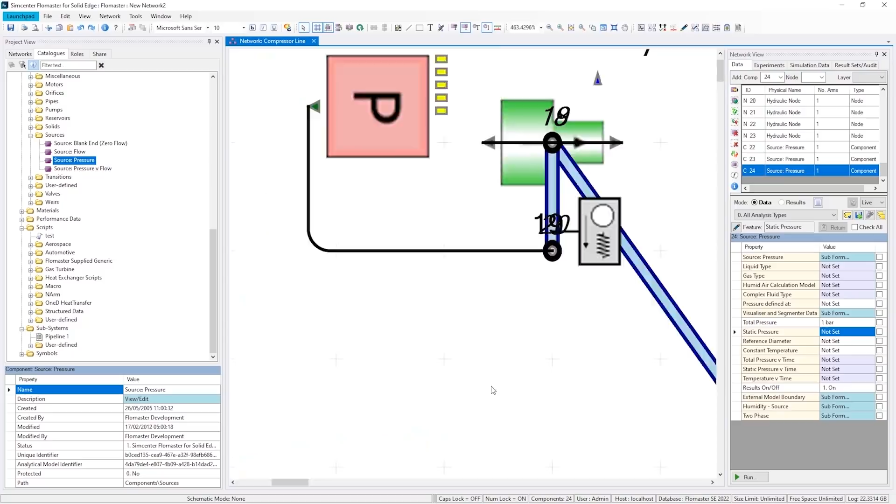For this low pressure system, we'll specify air as the working fluid and run a static simulation. Following the simulation, we can look at the results for individual components or look at the whole system using network visualization. With this, we can quickly oversee flows, pressures, and velocities.

Next, we'll look at the effect of a pressure pulse from the compressor on the system. We'll specify curves defining the pressure pulse at the source, and then run the transient simulation.

Following the simulation, we'll look at the flow into the tank, where we can see the effects of the pressure pulse from the compressor. Then, moving to the compressor outlet, we can enable transient visualization to see the variation in flows, and that the larger flow is from the left-hand compressor.

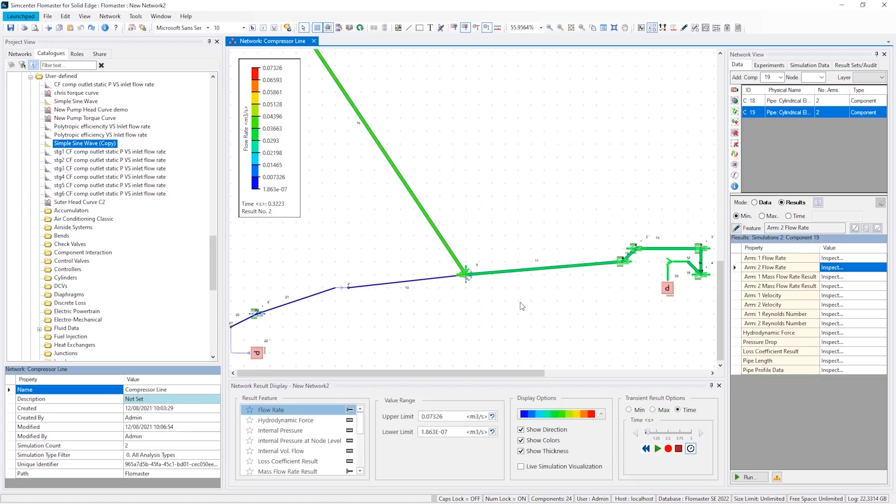Thanks, Jeff. Some super advanced technology there that we're happy to bring to the Solid Edge community. This is one of the advantages of the Xcelerator portfolio, the ability to bring advanced technology to you.

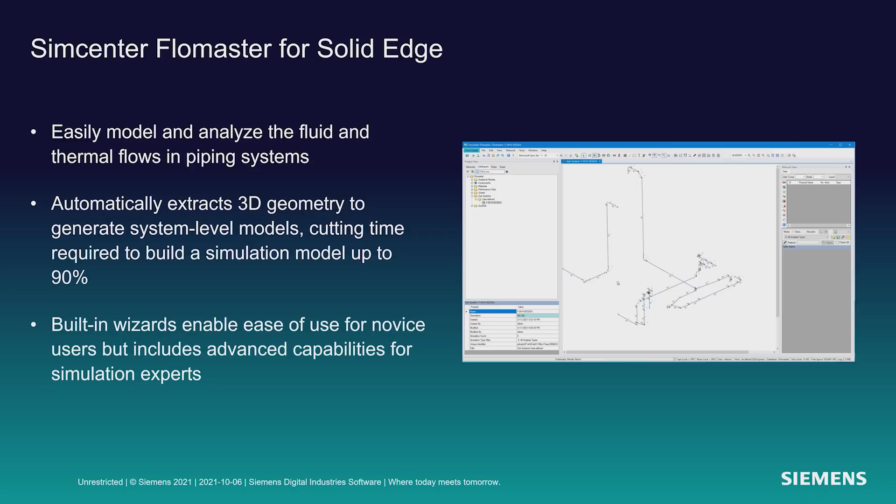Great capabilities here in terms of easily modeling and analyzing the fluid system, with extraction of the center lines automatically from the 3D geometry, so you can go straight into that analysis and see what's going on with your system.

So that was a feature-packed release, right? We went through a lot of stuff, many things in Solid Edge 2022 that are going to help your business. There's simply so many amazing things in there. The number of improvements are enormous. And I think that's been echoed by all of our beta customers. Everyone is saying, this is the best release of Solid Edge ever.

And so much more. We're able to show you a lot of great things in Solid Edge 2022, but there's so much more to see and learn about, and I invite you to do that. Go to siemens.com/solidedge2022, or scan the QR code and learn about the rest of Solid Edge 2022.